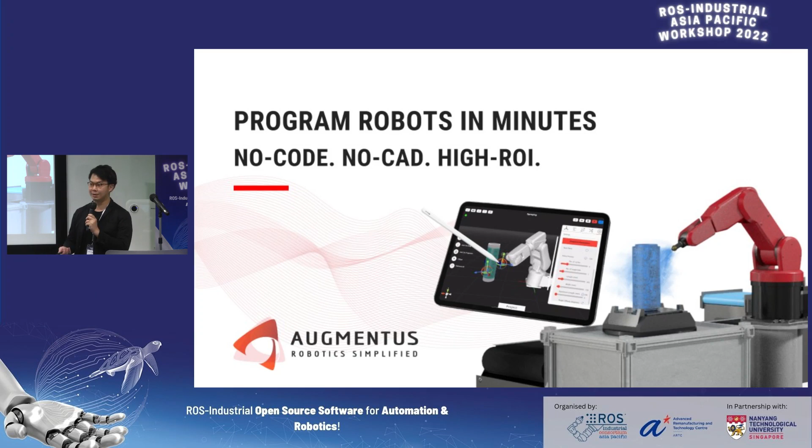Good evening, everyone. So my name is Shin, one of the co-founders of Augmentus, and we are a spin-off from this institution, ARTC. We were founded several years ago in 2019, and our objective is to democratize robot programming. So as we all know, ROS is meant for developers, for people who are very familiar with programming, like Python, C++. But how about operators in the factory who are not very familiar with all these codings and technical robotic stuff? So we set off, and this is our mission.

So we set out in 2019 to solve this particular problem of robot programming hurdle faced by a lot of the factories. So when we speak to a lot of the factories, customers and so on, they can have a system integrator that develops a solution for them, and then they deploy. What happens after that? What if they need to reconfigure the system? What if their operators don't know how to do the reconfiguration, don't know how to do the programming?

Then what will happen? So therefore, the three of us: I was from A*STAR, a tech lead, and then the two other founders, Daryl is from business, and Voon is our CTO, together with advisors. One is from GreyOrange, an AI robotics startup that raised $180 million before, as well as Joyce, head of the Unity business unit. The reason why she's an advisor to us is because we primarily use Unity 3D to do robot simulation.

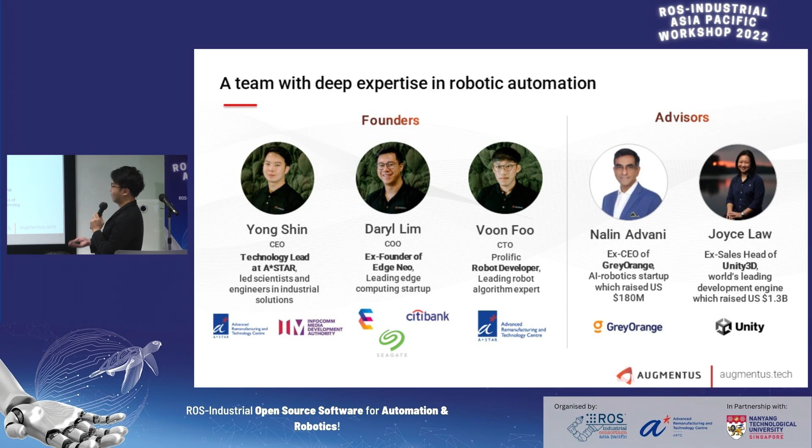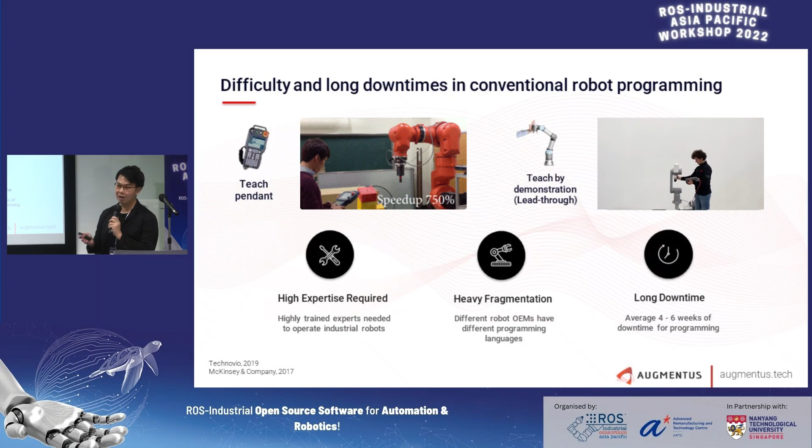So what we are setting out to do is that right now there are a few methods to program a robot. You can have a teach pendant, you can use lead-through programming, or you can use offline simulation software like ROS to do the robot programming. But all of these methods require high expertise. You need someone that knows programming, you need someone that's familiar with the robot. And each and every robotic brand has their own programming language, which makes it difficult for the engineers. So a lot of times it takes a very long time for a factory owner to configure the robotic system to cater to a high-mix production environment.

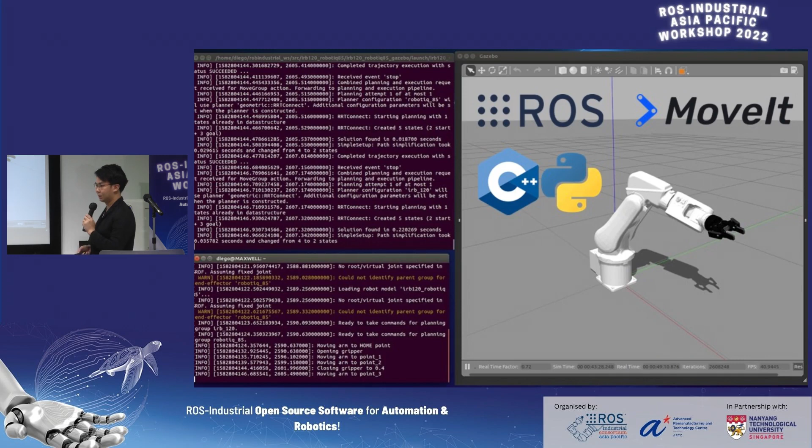So we understand that ROS uses MoveIt to do kinematic simulation, motion planning, and it primarily uses C++ and Python. It's a very powerful solution, and we have a lot of experience with ROS. We use ROS primarily for validation and simulation. However, how we extended our solution is to compile it into a tablet form. That makes it easier for the end user to use inside the shop floor. Because a lot of times, in the actual production environment, the shop floor is very sweaty, it's very cramped, it doesn't have a lot of free tables around, doesn't have access to a power point everywhere. So we compress everything to make it a portable tablet system.

So we are an A*STAR spin-off, but at the same time, we are the official go technology partner of Rockwell Automation. That means that on our system, we not only can program and simulate a robot, but the user can also simulate the PLC as well. And our solution is actually downloadable from the iOS Apple Store. The user simply goes to the Apple Store, finds Augmentus, and is able to download and use it to simulate a robotic system.

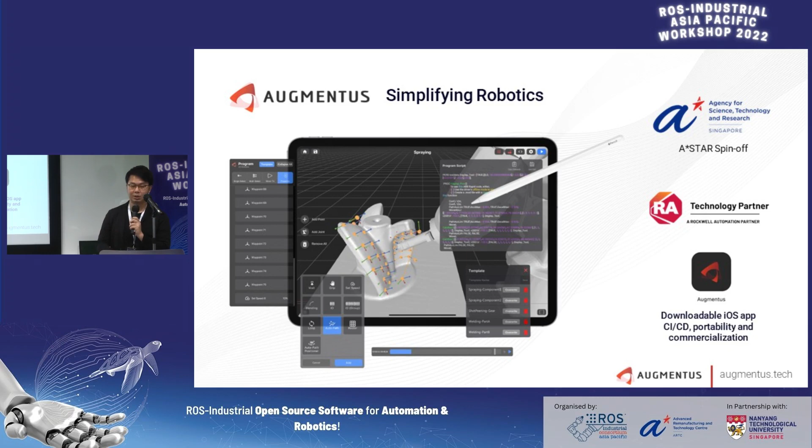How we work is that we use a scan and plan methodology. All the user needs to do is use a tablet, do a 3D scan of the workpiece and the robot cell, and use the 3D scan as a basis to do robot motion planning. We use basic digital waypoints. At the same time, they can simulate, for example, reachability, singularity, and collision. And after the simulation is satisfactory, with a one-click button, we will send it to the robot as a remote deployment. So our total solution exists as a standalone tablet solution with a 3D scanner mounted on the back. So everything is very portable, very easy to use inside the factory.

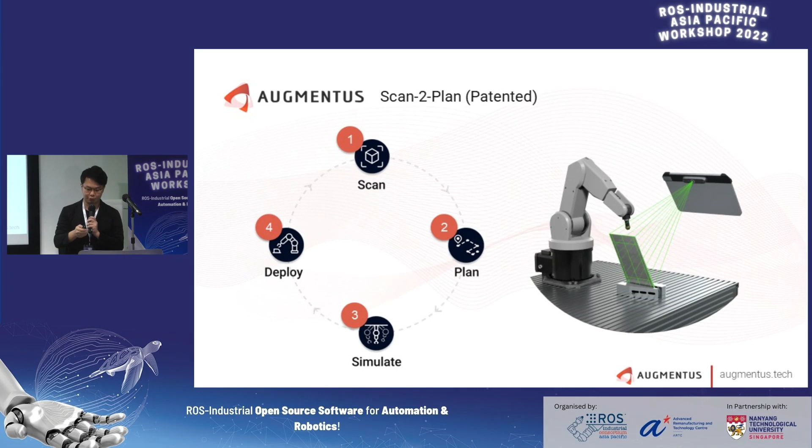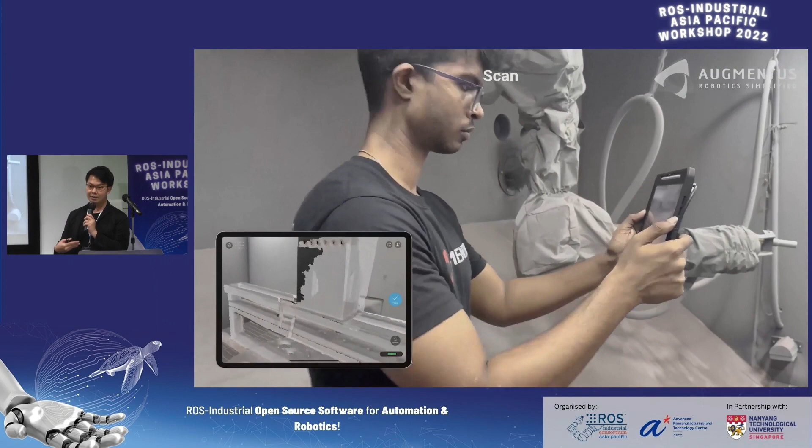I'll show you a video of some of the customer use cases. So this is sandblasting. The user takes a tablet and goes inside a sandblasting cell with an 8-axis system, that means an inverted ABB robot with a turntable and linear rail.

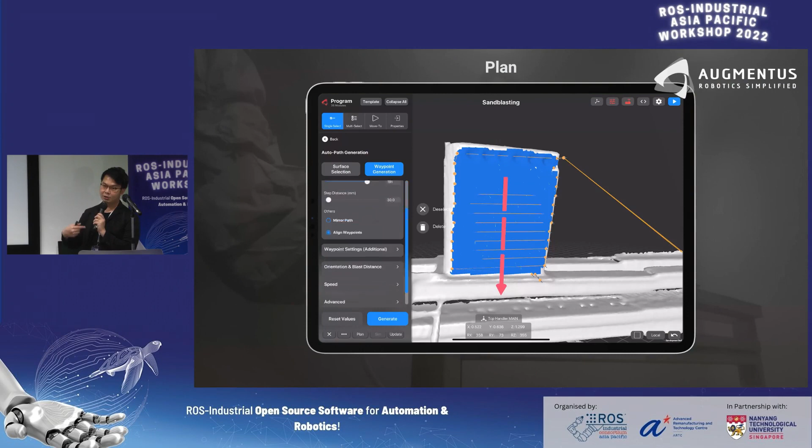And then with a 3D scan, they can just shade the areas they want the robot to do the blasting. And we will automatically generate the motion for them that is specific to their process parameters. So you can see here, all the user needs to do is just shade different areas and we generate the motion, catered to their needs.

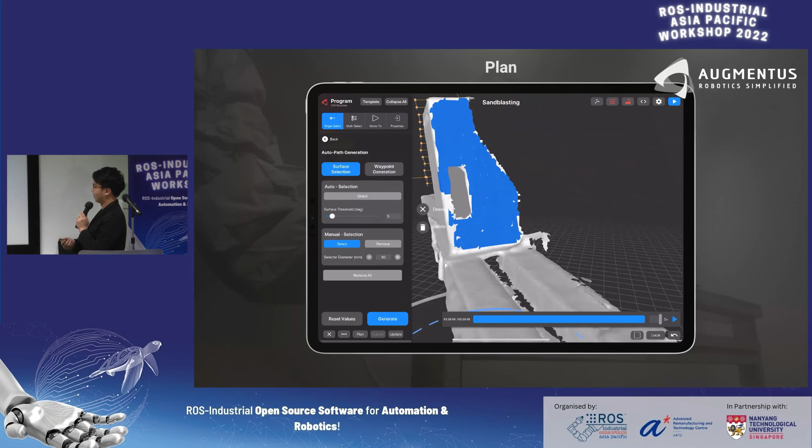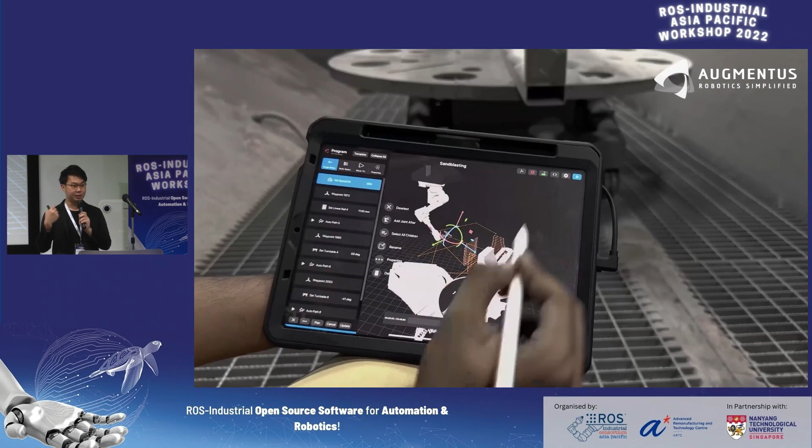So the entire simulation of the linear rail, the turntable, and the inverted robot is all within the tablet itself. And we'll generate the robot-specific code. In this case, it's ABB. We generate RAPID, and then we click one button, and we send it over to the robot through TCP/IP and FTP.

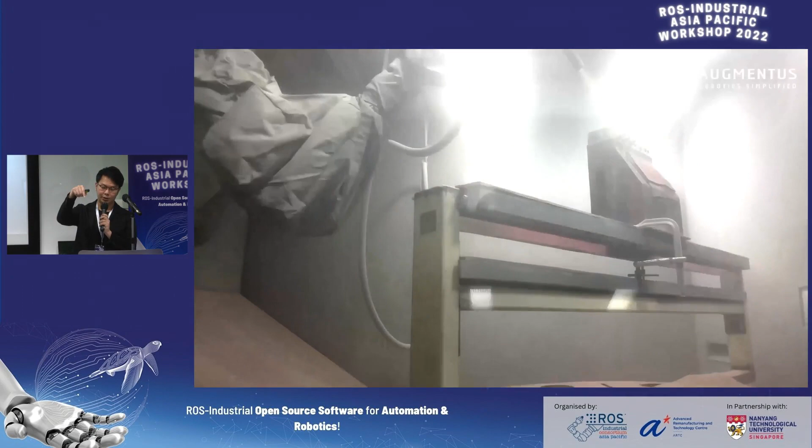So our aim is to dramatically cut down the programming time, because before Augmentus, they needed to spend a few days for the operator to teach the waypoints. For every waypoint that they teach, they need to actually measure the distance and the angle. So imagine there are hundreds of waypoints, it actually takes them a considerable amount of time to teach it. By using our solution, they can do it very quickly.

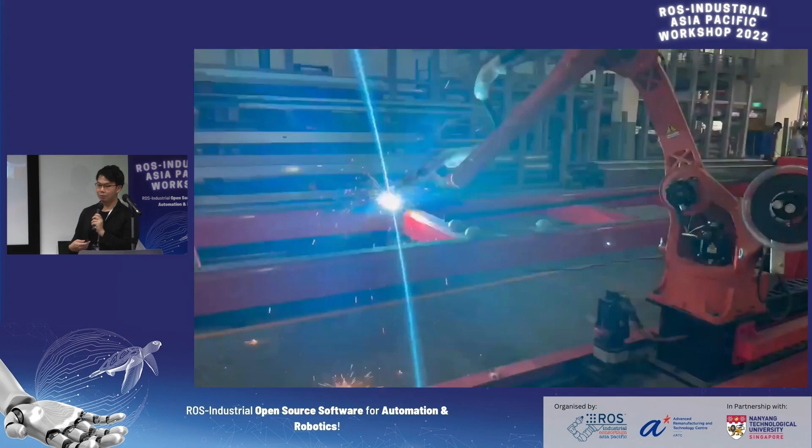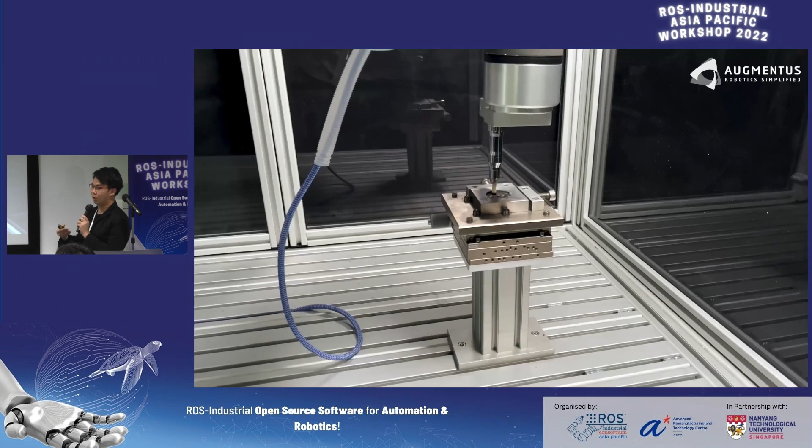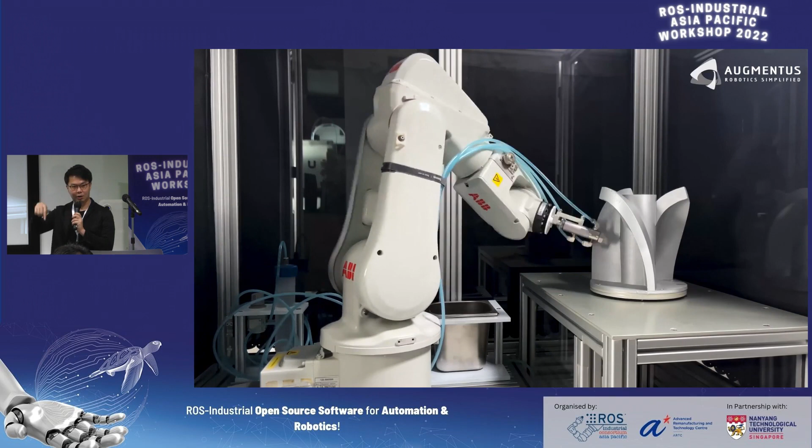We also expanded our solution to do welding applications. So this is not an ABB robot, this is a Chinese robotic brand. We also extended our solution to do polishing of injection molds. And then lastly, surface coating as well. So for the robot movement for surface coating, you need to actually do the edge banding to coat around the edges before you coat the center part. So all of this can be done through our software with a scan and plan methodology using a tablet only. So we cater for different use cases.

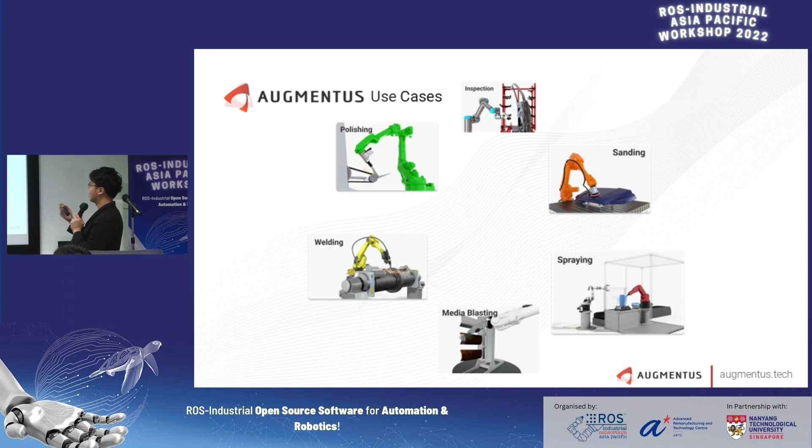So we have customers that use us for polishing, inspection, sanding, spraying, media blasting, as well as welding. We also have customers such as ST Aerospace, ST Land, Hyundai, DJK, Johnson & Johnson, then Abrasive Engineering, and so on. The primary way that we distribute is through system integrators, like Infinity Robotics in the US, Autoline as well. And we also have a strong partnership with some of the robot OEMs like ABB, Rockwell, Universal Robots, and Mitsubishi.

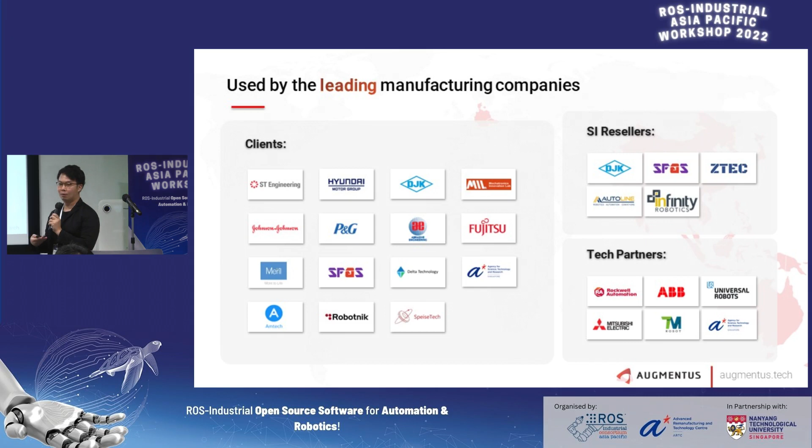So we do have extensive collaboration with the ROS institutions. The first one is we have collaboration with ROS-I Singapore on some of the projects. I can't disclose the customer and also can't disclose the exact nature of the project. But I can give a description of how we collaborated with a ROS institution.

So the institution used Augmentus as a way to take pictures using the tablet and use the pictures generated to annotate different SKUs to build an AI model. We used to have an inbuilt AI model generator where the user simply uses an iPad, takes a picture, annotates, and then generates an AI model. And the AI model is able to synchronize with the robot simulation environment that we have to do inspection and pick and place.

But in the middle of this year, we deprecated that functionality because we realized that it's actually quite costly for us to have a cloud-based AI model building system, because it takes a few hours or even days to train an AI model. So when we tried to scale it up to different customers, we realized that we incurred more cost than profits. That's why for now we deprecated it, and we plan to reinstate the AI model building with robot simulation at the start of next year.

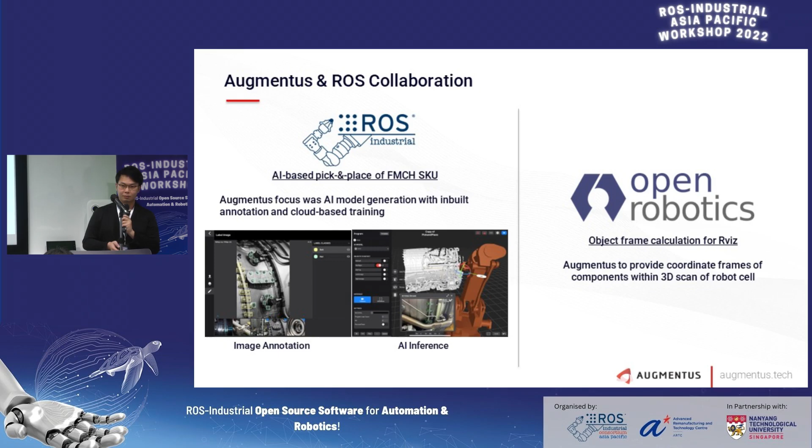So this is an example. So they did a 3D scan using a tablet, and then we are able to help them to localize the position of the robot by what we call the auto detection. And after the calibration is done, then the actual position of robot relative to the 3D scan is derived automatically.

And we use something we call the Datum Spheres. And we recognize the Datum Spheres in the 3D scan to serve as a reference frame. And then what happens is that the user can select points in the 3D scan they want to derive the reference frame or the coordinates. And after that, they can just send it to their own RViz environment or ROS environment to use it for their own applications.

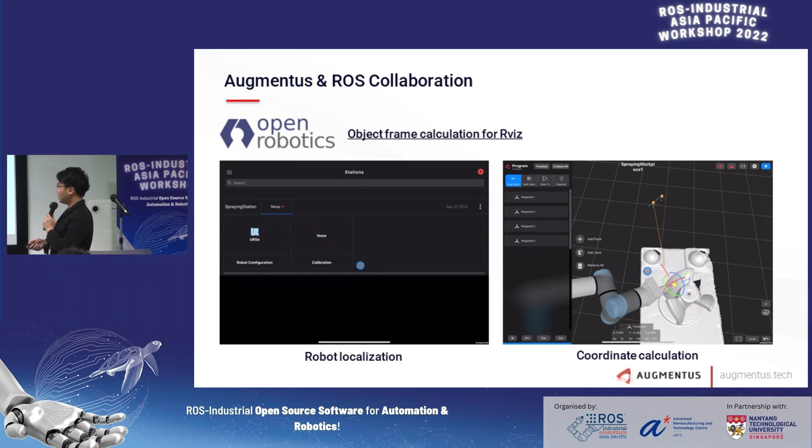So even though we have been using ROS for validation for quite a while, because all the robotic simulation, kinematics, motion planning takes place inside the tablet. So we don't actually use MoveIt to simulate, but we view MoveIt as a golden standard to validate ourselves against too. But we do face some of the challenges when we try to use ROS to validate our software,

because a lot of times when we derive the URDF from the open source, for example, for different robotic models, we realize that some of the URDFs are not accurate. Actually, this is especially true for more obscure robotic brands in the market. So a lot of times we actually need to go back and create our own pipeline to generate the URDF that is more reflective of the actual robot dimensions.

So what we feel is that if there is an official URDF repository that covers a wide range of robotic brands and models, I think that can really help to accelerate a lot of the robotic simulation or development on the market.

It could be our lack of knowledge on how to exactly find the correct URDF, but what we realize is that different URDF models are scattered in different repositories, so it's a bit hard for us to find the correct one. Because for a single brand or a single model, there could be different repositories. Actually, we spent a lot of time trying to validate and cross-check between different models. That was the time-consuming part for us as well.

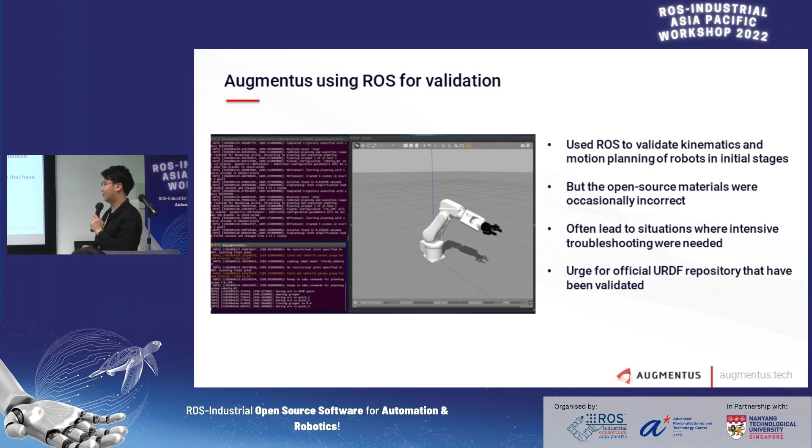So what we are going to do next is we are going to upgrade the fidelity of the scanner that we use. Right now, the scanner that we use has an accuracy of 0.5 millimeter. What we want is to upgrade to higher fidelity scanners like a Photoneo or Artec to help us to actually do more complicated applications that require higher precision.

We already have customers that use Artec for scanning of welding parts, but we do want to work with someone that is very familiar with 3D scanning systems to come together to develop a turnkey solution for industrial scanners that actually can help to achieve different complicated use cases.

So if you're very familiar with 3D scanning, and you're also looking for a partner that can help you to deploy in an easier manner, we already have an interface, we already have the app, and our app is actually on the App Store already, so all the commercialization, the pricing, everything is set in place already. So the customers just go to the App Store, they pay through the portal, and then how the profits are distributed for the systems that we collaborate on and develop, I think that can be discussed later on.

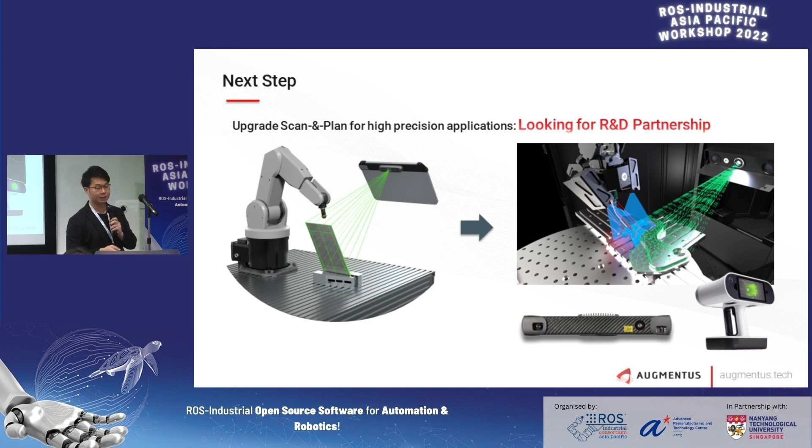Okay, so I think for us at this stage, we are very open to collaborations, because if we develop everything in-house, it will take a very long time and a lot of resources. So, for example, if you use ROS-I or ROS 2, you develop your own algorithm, or your own optimal process parameters for different applications, or you have a different design of a novel system, we can work together, and Augmentus will be the interface for your own proprietary system that allows you to reach out to the operators or the engineers in the factory environment.

At the same time, we offer easier, optimal UI/UX, a very interactive user interface for the user to fine-tune and reconfigure the system. We also can offer coordinate frame calculation that you can import into your ROS or RViz environment.

And we also allow the user to inject their own API libraries inside. So for example, if you have communication with a specific ROS node that uses custom messaging, then you can actually write your own API and implement it into our solution. You can call and synchronize with your own solution. And we do offer connectivity such as TCP/IP, FTP, and RESTful that caters to your communication needs.